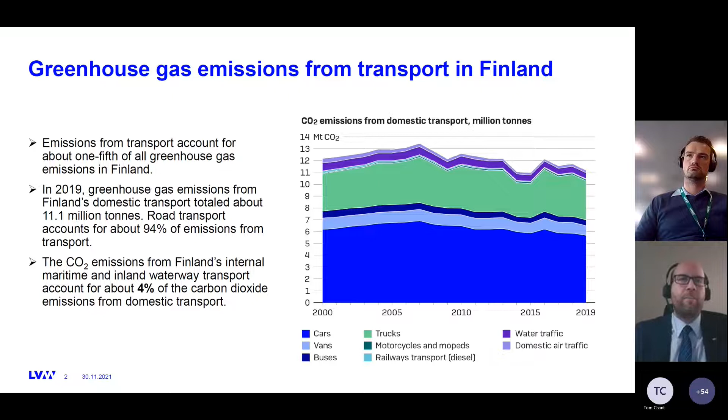There are very important negotiations going on at the IMO on these things, and also things happening, as you all know, on the EU side. I'll get to those later.

Just wanted to say that year-round shipping is, of course, very important for Finland. The Baltic Sea is one of the busiest seas in the world, and 83% of all freight transportation in Finland is carried by sea. Good connections to world markets and effective logistical chains are something we rely on here in Finland. Finland is practically an island when it comes to shipping because we have winter conditions here. Every winter, the northernmost parts of the Baltic Sea freeze over, and we have to ensure a level playing field for ice-class ships when it comes to international regulation.

Another aspect I wanted to quickly touch upon is short sea shipping in the Baltic Sea. This is a very important aspect of shipping for Finland, as the majority of goods to our ports come from or move between European Finland and other European states inside the Baltic Sea. So this is short sea shipping that we rely on very much.

This is also important on the emission reduction aspect because Ro-Ro and Ro-Pax vessels, which we have a lot of in Finnish traffic and Baltic Sea traffic, have emissions per transport work that are higher than other vessel types. This is kind of a special challenge that has to be solved somehow, and I really wish that we can solve this with our Baltic colleagues and our European colleagues.

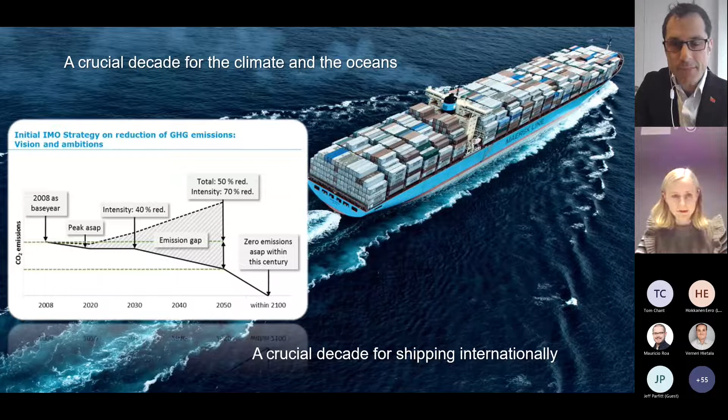As mentioned in the beginning, what we do in Norway does not happen in a vacuum. We know that we need to succeed with the global transition of the shipping sector if we are to succeed domestically, and vice versa. The GHG, or emission, situation of international shipping is also showing that further effort is needed, as you can see illustrated here in the graph. We are not on track internationally either.

If we are to succeed with the largest transition of the shipping sector of our time, cooperation is key, and we need to take actions together. Shipping is, as Eero also mentioned, by nature international. And the declarations already mentioned earlier, adopted at COP26, provide a very good foundation for cooperation among the UK, Finland and Norway in this context.

Firstly, through the zero emission shipping by 2050 declaration, we agree on the target. And secondly, the Clydebank Declaration provides a frame for how to think around the establishment of the first zero emission shipping routes necessary to get the transition going. The UK, Finland and Norway are perfectly situated to take on this task, and we look forward to continuing the cooperation with you. Finally, I also wanted to mention Mission Innovation and the zero emission shipping mission that was launched earlier this year.

We take part in this together with the US and Denmark as co-leads, and the UK is a core member. It's of course open for more if anybody else would want to join. This takes kind of the same approach as the Clydebank Declaration, but on a lower level. All of these initiatives are, in our view, important to succeed. Thank you.

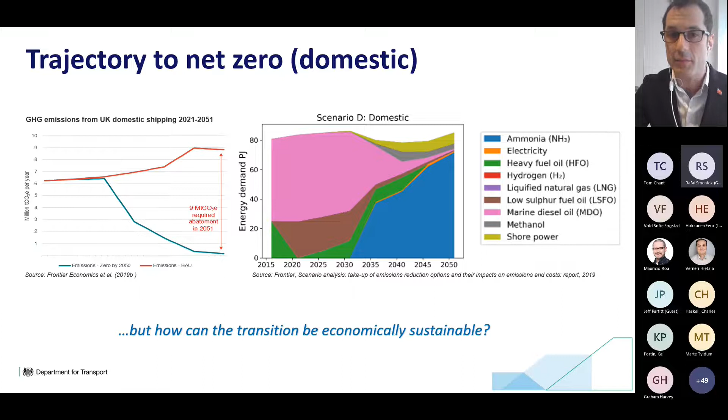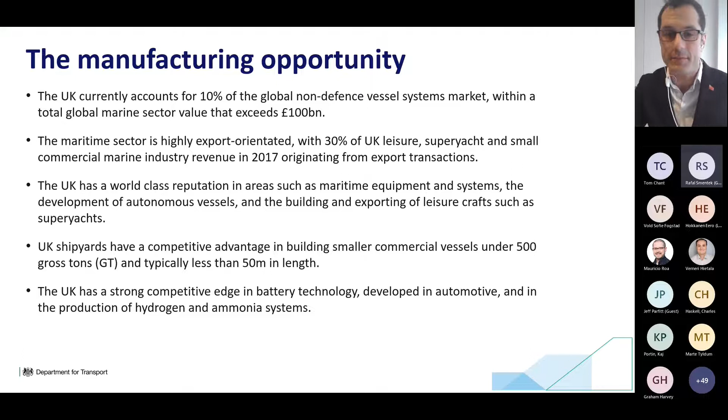So how do we harness all of this? There are problems to do that, and fundamentally, we do know there are - and I believe this is the same for other countries as well - a series of barriers to R&D and innovation in clean maritime.

One example is that in the maritime sector, at least in the UK, all actors are private, so no ship operators are going to invest in zero-emission technologies if they don't see the refueling infrastructure in place. But at the same time, no ports are going to invest in zero-emission refueling infrastructure if they don't see the demand. At the same time, there are split incentives to invest between ship owners and charterers, considering around 50% of the global fleet is chartered.

So the question is, how do we overcome all of this? Others before me mentioned the role of regulation, and we are exploring that. We do have a plan, and as mentioned, we started with a Clean Maritime Plan, which essentially sets up a series of interventions to do two things. One is to make sure that, to achieve the ambition that by 2025 all new vessels designed for UK waters are zero-emission capable, and to make sure that by 2035 the infrastructure is there to support them.

So we have implemented the Clean Maritime Plan, and we are now looking forward with the Transport Decarbonisation Plan, which has a section of maritime commitments on regulation - for example, setting up an indicative trajectory to net zero for the sector, and a consultation on a phase-out date for non-zero emission vessels.

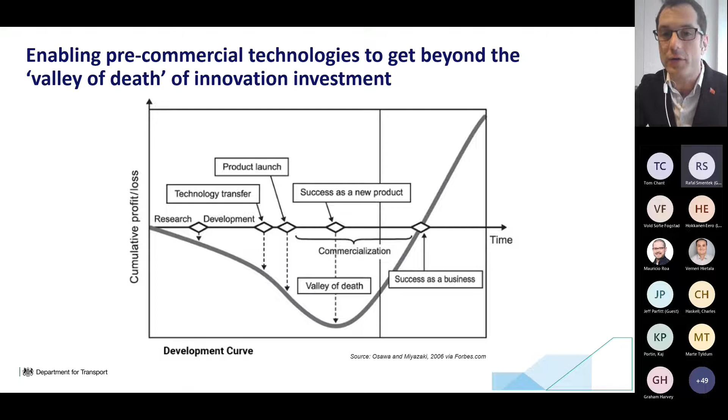So what government does with technology demonstrations is to plug the cash flow shortfall in the so-called valley of death, supporting innovators via R&D funding to get that product to commercial stage, which is what we are doing with the Clean Maritime Demonstration Competition, which was announced in November last year as part of the Prime Minister's 10-point plan. Essentially, this is a £20 million R&D program supporting feasibility studies and initial technology trials in emerging clean maritime technologies in terms of vessels, fuels, and infrastructure.

So this competition was oversubscribed. It demonstrated the capabilities of the UK maritime sector and, importantly, the appetite to invest. So with an initial funding of £20 million, we've managed to raise investment proposals for £70 million.

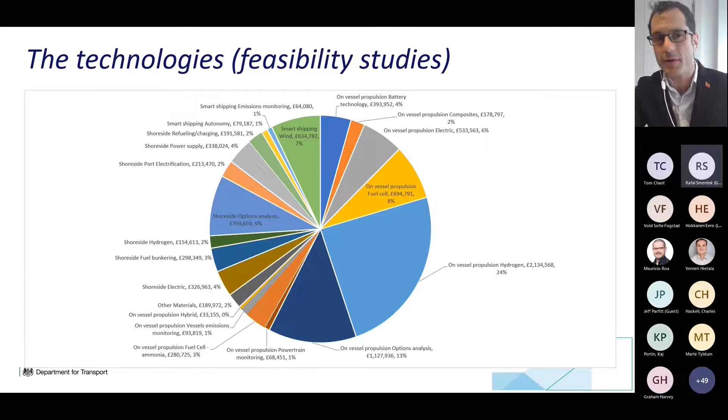There are a few other slides - I think we can share this presentation afterwards. I'll go through quickly, just to give a breakdown of technologies supported under feasibility studies and technology trials. By the way, that was for us real market research - for the first time, we were able to understand exactly what the intentions of the wider industry, including the maritime sector, are when it comes to investment in clean maritime technologies.

Now, for us the question is then - we have identified a UK clean maritime supply chain. Now the question is, how do we project that internationally? And the work that my colleagues on the international side of my division have been doing has been really, really useful.

So you all mentioned the role of the Clydebank Declaration in effectively bringing people together, right?

So what we've been doing is, on one side, immediately build a coalition of industry frontrunners with Operation Zero - 28 industry players in the UK, most of which are winners of the Clean Maritime Demonstration Competition, which shows the link with the domestic supply chain, focusing on accelerating the decarbonisation of offshore wind vessels in the North Sea.

But then, in the medium term, how do we institutionalize that as part of an international partnership via the Clydebank Declaration? 22 states signed up to the creation of green corridors - at least 6 by the mid-2020s, increasing after that. The idea is to have live places across different countries where we can test and deploy new technologies.

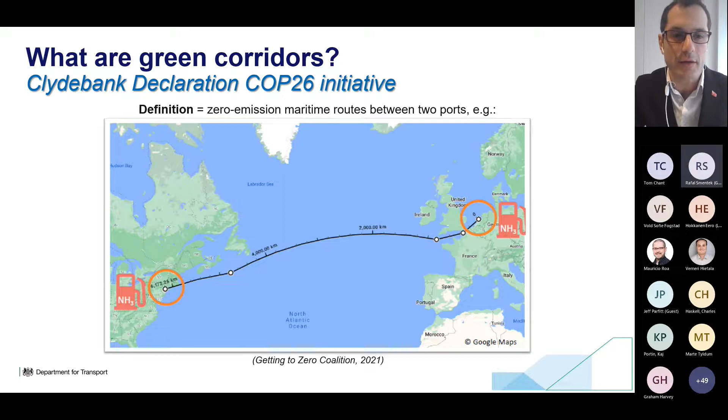To wrap up my presentation, the idea is to establish a series of routes in the near term to support the IMO agenda, but also create living labs where we can test those technologies. That's being delivered via a high-level agreement signed at COP. I'm very keen to explore more with you how we can operationalize Clydebank - and that's just a list of the signatories. That's it from me.

Paolo, thank you very much indeed - very interesting, great to get that overview of what the UK is doing. So all the policy people, if you could stay in the background, we're now going to look at organisations putting together the different technologies. We're starting with Lloyd's Register. Charles, give us an overview of their decarbonisation hub - it's going to give us the higher view of what's happening within the industry. So Charles, over to you.

Thank you, Tom. Okay, hopefully my slide is available. So firstly, just to introduce myself, I'm Charles Haskell, Programme Manager of the Maritime Decarbonisation Hub, a programme jointly set up between Lloyd's Register Foundation and the Lloyd's Register Group, with the mission to accelerate the safe and sustainable decarbonisation of the maritime industry.

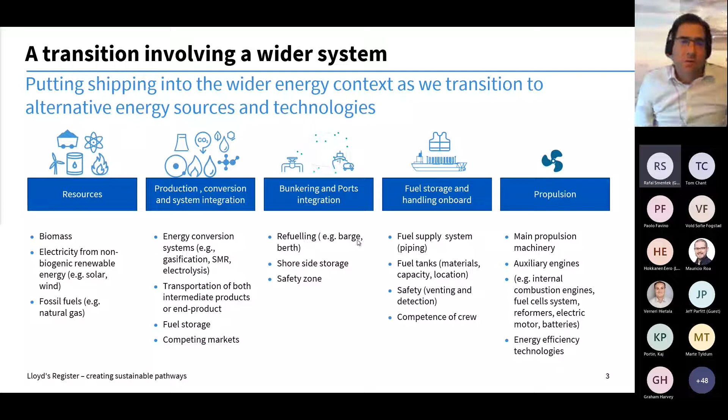So what we have seen is the technology readiness overall is the highest. Marine solutions are being validated. The Clean Maritime Demonstration competition has also been very good at this, selecting projects, and we are involved from the Decarbonisation Hub on some of those projects, particularly for the port side and the infrastructure projects, both at Port of Grimsby and also Portsmouth International Port.

When we look at the community readiness, as discussed, the policy levels are currently low. The policies are coming into place at the moment. We saw increased ambition at COP, and this isn't just, as we say, about the policy, it's also about that societal pressure now as well. We're seeing that through the coZEV agreement, as I mentioned earlier, but also other levers and people being more selective about the products they choose going forwards.

But what was very interesting when we built up the model was we had a low investment readiness level rating for nearly all of the zero carbon fuels across the different supplies and stages of the supply chain. So these fuels are currently more expensive than fossil fuels. There's uncertainty on the fuel relative to competitiveness in the long term, and the commercial proposition has not been formulated.

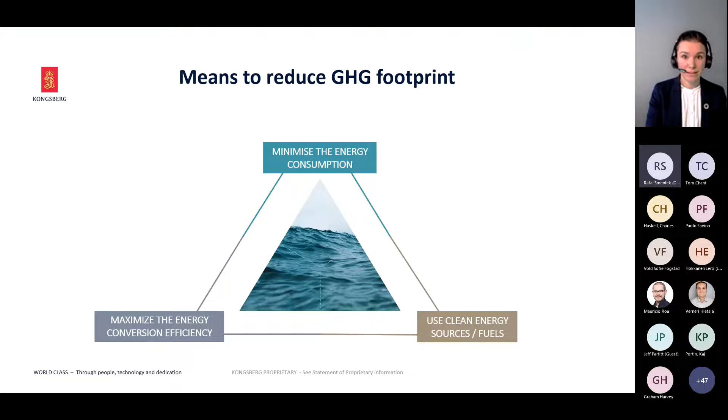Because there are several means to reduce your greenhouse gas footprint, and the most efficient is, of course, on the lower right corner of this triangle - use clean energy sources. Importantly, they need to be clean well-to-wake, including the production process of the fuel, and there are several really good candidates. Wind is rather interesting and will be touched on later today. We've just, a couple of weeks back, also signed an agreement with a company called Norsepower to integrate rotor sails. What I think is quite nice is that you combine traditional technology like our controllable pitch propellers with this new technology, and you get much better effect of these new technologies coming in.

In addition, you see batteries and shore power - of course, that's the far best conversion rate there is, but it has setbacks, for instance, for longer distances. The next speaker will elaborate more on these possibilities of new fuels. But common to most of these solutions is that they're more expensive than the current options. So minimizing energy consumption through, for instance, hull cleaning - we've developed a robot that will drastically reduce the need for hull cleaning. You can also use means such as route and speed planning.

And all of these would be of better and higher financial importance in the future than it would be today. Similarly, maximizing the conversion rate through optimal propulsion systems, maybe delivered in Finland, recovering waste heats, using batteries again for peak shaving, will continue to

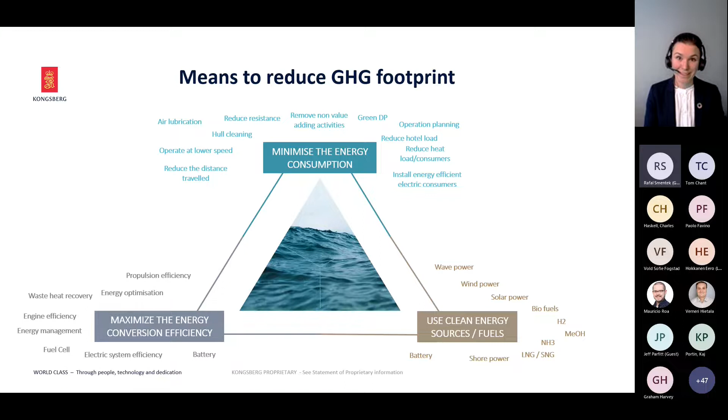Have really strong business cases moving forward. But as you see, the menu of solutions are quite broad. And for some of these initiatives, the onshore infrastructure and availability of clean energy will be the tipping point. And as a technology provider, we need cross-nation regulations and standardization for us to work with our customers to find our best solutions. So again, shipping is cross-national. And I'm very happy to see that, for instance, the Clydebank Declaration is tracking on with more and more countries. So that will be an exciting one.

So at the moment, we're running several rather exciting programs, trying to recover from what was called the valley of death, mentioned by Paolo, to have full-scale projects for low carbon and zero emission. Some of these I've summarized on this slide.

And the HySeas III is a program for pressurized green hydrogen. It was supported by the EU Horizon 2020, but it is a full-scale and scalable hydrogen solution. And I'm very happy to say that we're closing in on the last phases on this project. So for those of you who are really curious on hydrogen, please do reach out after this call, and I'll provide you with some more findings and some more details moving forward.

We also have Samskip and HyShip on hydrogen. And it was mentioned earlier that Norway has really looked into hydrogen as one of the solutions to especially short sea and domestic shipping. But then again, we have the now sailing Yara Birkeland, as well as ASKO, targeting the quite exciting combination of autonomy with fully electrical vessels.

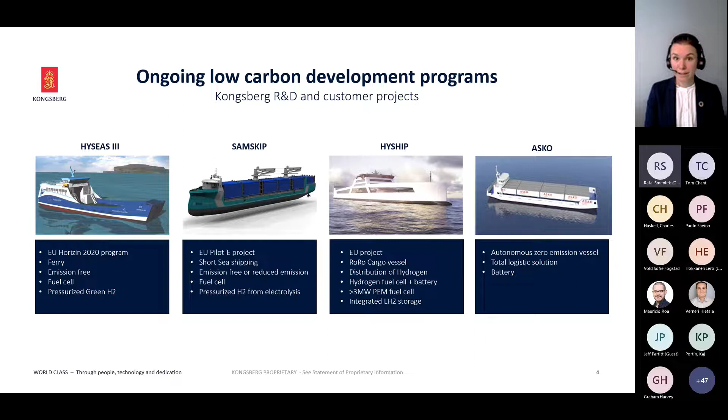So also there, what I find is quite exciting is that these projects are done together with the cargo owner. And the cargo owner has really pushed us as a technology provider to deliver something directly for them. Other initiatives like the coZEV was mentioned, and I think the strength of the cargo owners would be really important moving forward.

But we have on the ocean around 100,000 vessels sailing. All of these initiatives that I showed you was new builds. Kongsberg has, as I said, the broadest portfolio of products for the maritime industry. That means that 30,000 of these vessels are sailing with our equipment. And that is a big responsibility for us.

And it also has taught us that there is not one silver bullet when it comes to green shipping, because each vessel is different and each operation is different. There might be 30,000 silver bullets. And upgrading the sailing fleet is still a huge potential. But sometimes we need a little bit of an external push to get it started.

In the end, we introduced batteries, renewed the propulsion systems, we had new engines in and new control systems. And additionally, the vessel itself was completely upgraded and renewed to provide this modern experience that the passengers want. And that is also important when it comes to sustainability, to think whether or not we should scrap or build new or prolong the life. So as mentioned, these vessels had 25% reduction in fuel and emissions, and a significant prolonging of the lifetime. And the cost of all of this was around 20% of building a new vessel.

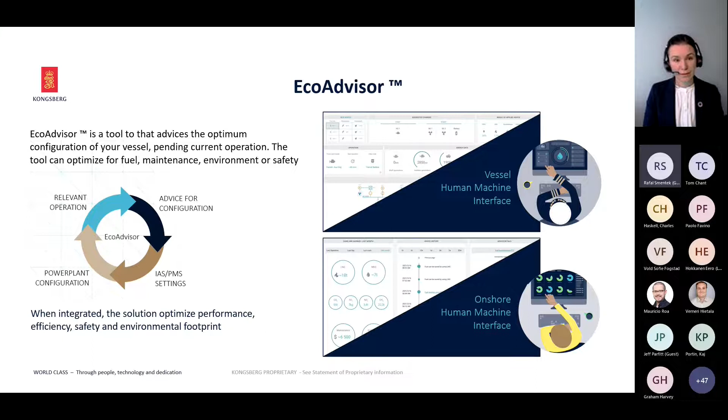Hello, right. Oh, it's gone a little dark there. Kaj, here we go. Sorry Kaj, I just missed that little transition there, the handover. So over to you, Kaj, from Wärtsilä.

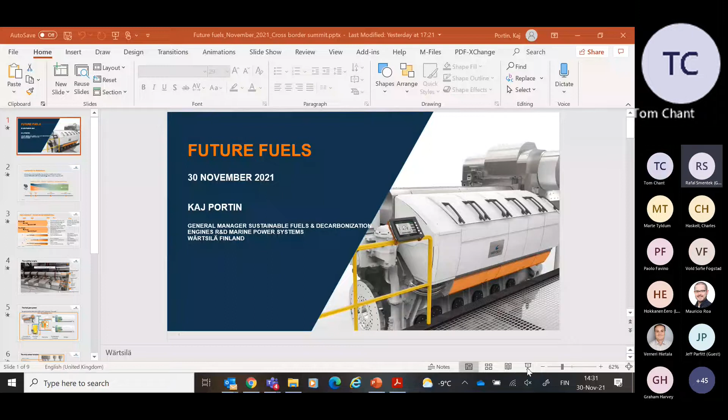One sec, yes, thank you. That was a real nice pass from you, Marte. Came very quickly, so I have to see if I can share my screen now. I hope you can see it. That's great, thank you.

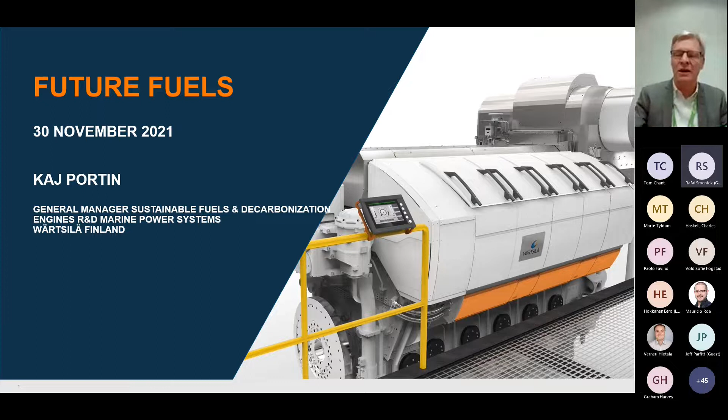As Marte said, I will now speak more from Wärtsilä's point of view about what we do with our engines in this area. Wärtsilä is of course looking into the whole ship solution regarding these issues that Marte was presenting. But in my presentation, as an engine developer, looking at the new fuels coming, I will present how the future can look and how prepared we are.

If we look at the future, what we know is that there is a transition ongoing. That's, I think, the only certainty we have at the moment. When Wärtsilä looks at where to go with the transition, we say that we will follow it by being good on the engines today, while at the same time being prepared for the future.

How we see future fuels is that today, as was shown by Paolo, we have heavy fuel, diesel and gas. Later on we will see drop-in fuels that can be blended into diesel or gas, like biodiesel or biogas, which can be immediately taken in. Further on we will take in new fuels that won't fit in the same fuel tank but will fit in the same engine and can be burned together with the fuel we had before.

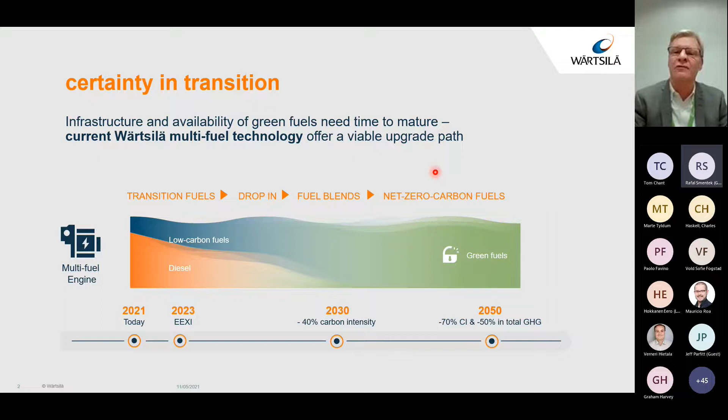And sometimes, after some years—10, 15 or 20 years, I don't know—the world will be ready for utilizing net zero carbon fuels, and then we will also have the possibility to use it in our engines.

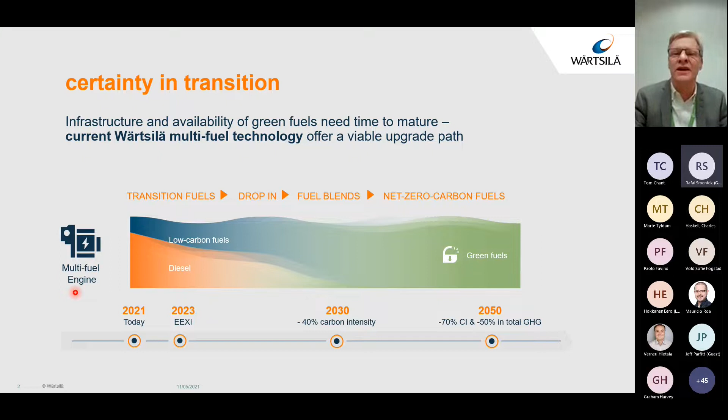What do we need for that? On the left side, we need a multi-fuel engine, because we cannot really say what will be the future fuel and when it will come. I agree with Marte here—you said, are there 50,000 silver bullets? I also agree with that, and I would add that there is a new silver bullet every day. So if you've bet on something today, it could be the winner, but it's not the winner after 5 years or so.

That's why we've built our engine program to look at two main streams with the fuels we have today: LNG or natural gas as one mainstream fuel, and diesel or heavy fuel as the second mainstream fuel. Both of these are today fossil fuels, but they can be made as bio or synthetic in the future.

If that happens, we can say we are already prepared and have been for quite a long time, because we don't need any new infrastructure on the vessel. The performance of the engines and the vessel will be similar or exactly the same as before.

Then, of course, if we go to real decarbonization—because here you will have decarbonization on paper, but really from the stack of the vessel and the engine, there will be just as much CO2 emissions from biodiesel as from fossil diesel. Then it's just up to legislation how you compare these two. But if we really want to get down in CO2 emissions, then we utilize fuels that don't have carbon in them, mainly hydrogen and ammonia.

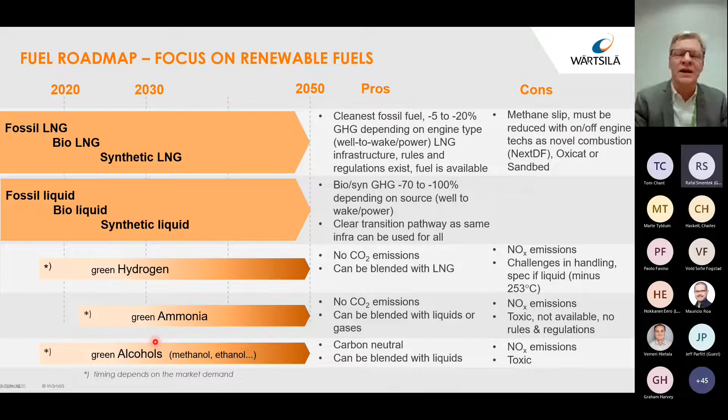How do we do this? We need to be flexible. We don't want to, or we cannot choose what fuel to be used now or in the future, so we instead make the engine so it can utilize all the fuels that are coming. Here I have just a list on the left side of the fuels that I have been using now on my engine. This used to be a diesel engine a couple of years ago, running only on diesel and heavy fuel, and now today we have been running on most of these fuels and still continuing to develop this for the fuels.

Also, the engine doesn't know if it's a biofuel, synthetic, or fossil fuel. So when we test, for example, ammonia, even if it's not green ammonia, for the technology development this doesn't really matter so much because the results will be the same. It's only then about waiting for the fuel and getting it in.

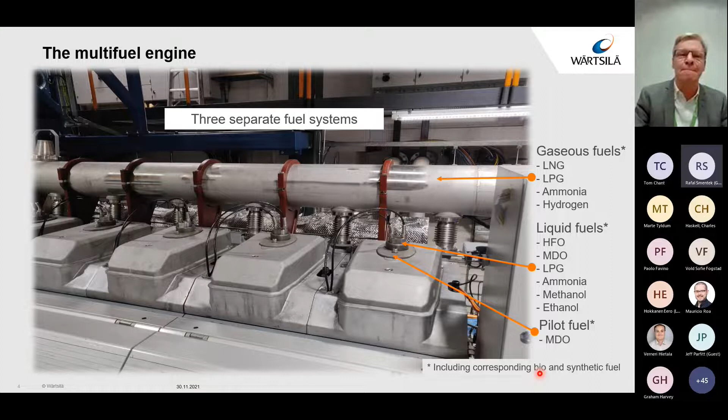Just an example of how to go forward in the future. If you today have designed a vessel or an engine for running on LNG, then you have fuel tanks with LNG, and you have control and you have the engine. When you want, and you get ammonia, then you can change.

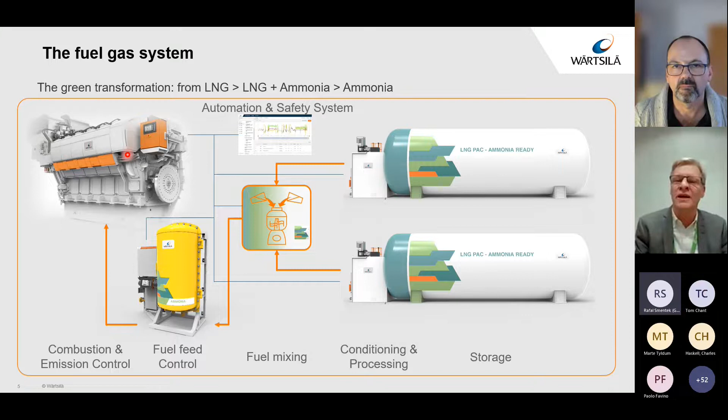So one of the fuel tanks is ammonia and the other one is gas, and you mix them before the engine and then continue. Then in the end, when you don't want to use LNG anymore and you are getting ammonia, you can utilize both tanks as ammonia and continue with pure ammonia operation. Whether this is within 1 or 10 or 20 years, I don't know, but the system is already there just to take it in.

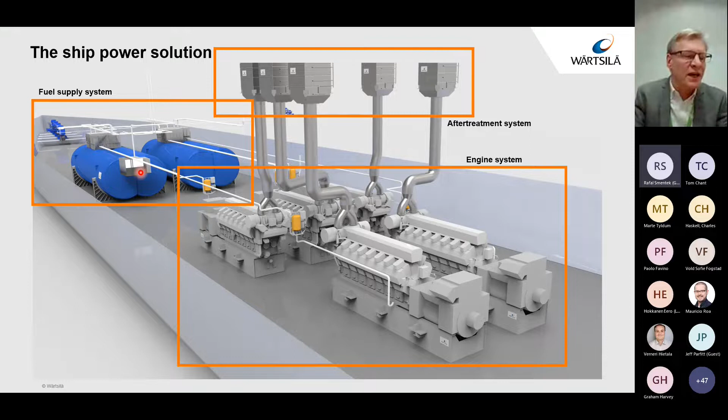We are also looking at that the engine is not only the engine. We are also looking at the fuel handling, in this case how to get the fuel, and as was said by Charles here, in a safe way. This is very important, especially when we have the discussion about ammonia and hydrogen as fuel.

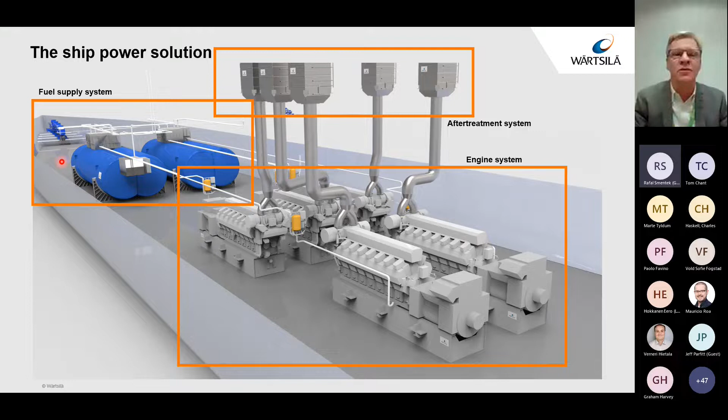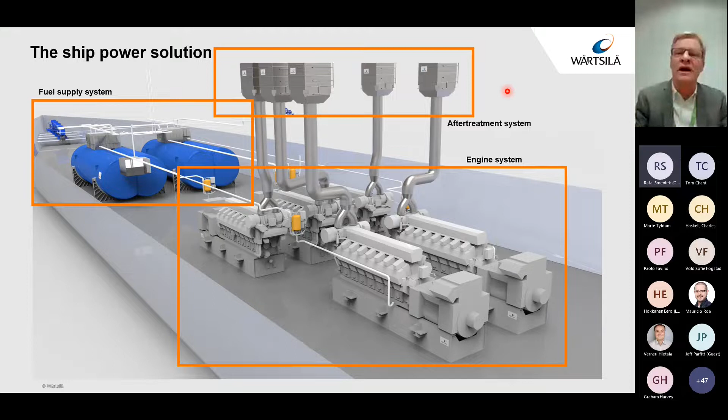Both are challenging, ammonia is very toxic and hydrogen is very explosive. So here we are looking very much into the legislation and what to do regarding bunkering and storing. Then the engine system, how to control the engine with different fuels, changing all the time or optimizing for one. And finally also looking at the after-treatment system of the exhaust, because there will always be some exhaust that has some kind of emissions, and if we cannot get rid of them in the engine, then we will have an after-treatment system to take care of that.

So looking at the areas where we would now like to cooperate with you all here, and where I see that we already do. Now I'm looking at this from the engine's point of view, but I think you have had the same things, looking from different points of view. But first of all is the legislation.

What can you do? What should you do? And is it the same if you do it in Norway or Finland or UK? This, I think, is very important, so we get a legislation that we can trust, so we can develop according to that. Then, of course, there's what I call the real work: to make the systems, the fuel system, the fuel handling, engines, exhaust and after-treatment system, etc., good, affordable, and robust.

Then the following, which has not been talked about today, is very important. When new fuels come in, we will need a lot of training and protection equipment for people. The training, especially for operators and service people, is a big thing we are looking into now, how to get them fully trained before the first vessel is out there. And then, of course, with new fuels and new systems, there could be teething problems.

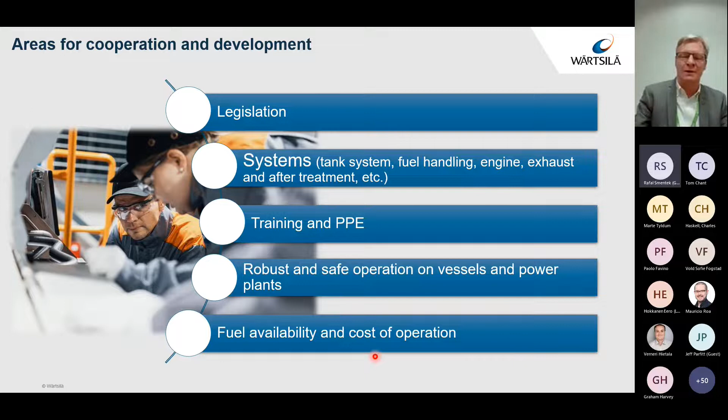Methanol, green methanol - Wärtsilä has already had one engine out, one vessel out with Wärtsilä engines, Stena Germanica, Sweden to Germany, already 6 years. So we show that the technology is working, and this is a good demonstration of utilizing methanol.

And then ammonia and hydrogen we are now developing, and the plan is that we will have the technology ready for ammonia already after 1.5 years, so we can go out demonstrating on a real vessel, real operation. And hydrogen - we already said 5 years ago that we can blend in up to 25% hydrogen, and now we are also developing our engines for pure hydrogen operation. But this will take somewhat longer.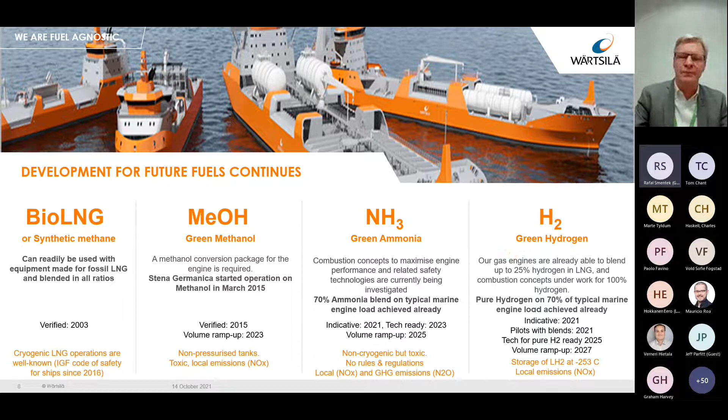Thank you. This is ending my presentation.

Kaj, thank you ever so much. That's an incredible amount of investment going on across all those different engine types, isn't it? Thank you for sharing that. I didn't realise some of the trials have been going on so long as well.

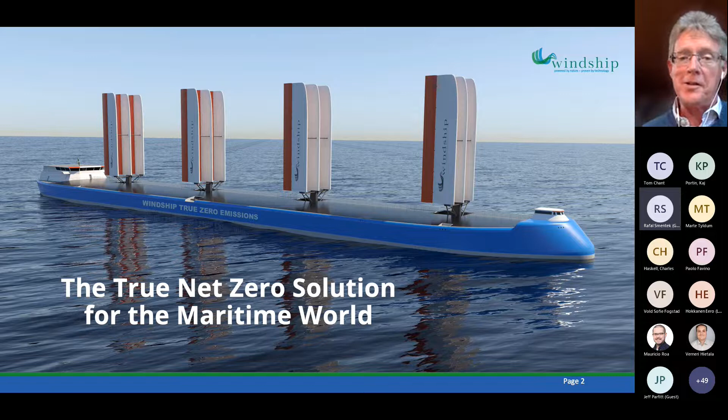So as you can imagine, we've done multiple iterations of the potential wing combinations, using CFD and our partners. And this established that whilst high lift coefficients can and need to be achieved with wings, it is surface area that is needed to develop the required ship thrust.

So the final solution was a tri-winged rig, which you can think of as effectively turning a single 100-metre high rig into a 36-metre high solution that can be more easily handled and controlled. And the performance of this rig has been verified through CFD, wind tunnel testing, and the Wolfson Unit at the University of Southampton.

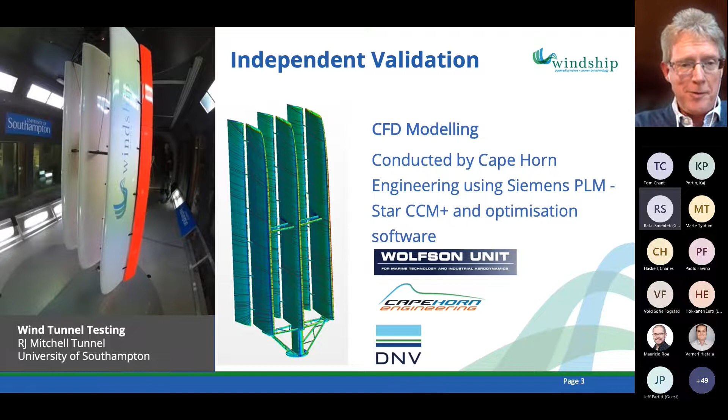Now, I've stated that the rig is powerful, yet I should clarify that. If we fit 3 of these 36-metre rigs, as shown here, to a Panamax Kamsarmax size vessel, so 80-odd thousand tonnes, we can provide 100% of the required thrust in 25 knots of breeze. So we are therefore sailing the vessel at this point, and it's not wind assist, but wind propulsion.

So this is an overview of the wind propulsion part of the story.

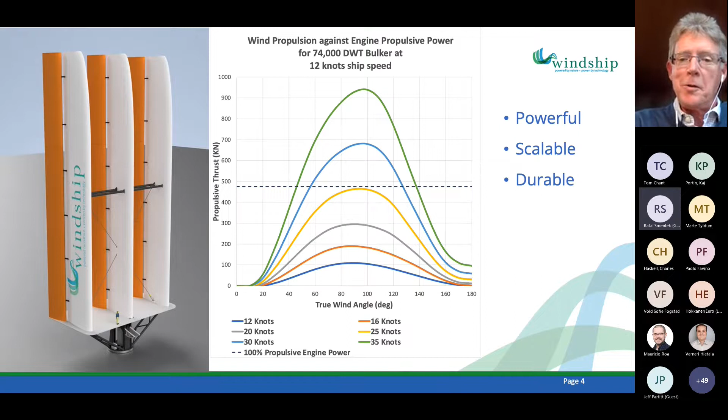So why did a company called Windship decide to look at the whole drivetrain issue? Well, the reason stems from the power the rigs can provide to the ship, which is forcing the existing engine and propeller system way outside of its usual operating envelope. This means we're not going to achieve all of the emission gains possible unless this area is addressed.

The move to electric propulsion allows us to add in solar power where the vessel geometry and route works, and indeed other green technologies such as batteries can be added in on the same system.

The current design has a number of diesel generators providing the electrical energy required for the motor. This modular approach allows the system to be flexible, switching off engines that are not required to ensure that the remaining ones operate effectively. Then, as we are using fossil fuel, we've worked with a company called Calix with their recast system, which captures the CO2 through an exothermic reaction, which allows us to recover further energy from the exhaust through a steam cycle.

So let's have a brief look at each of these system components.

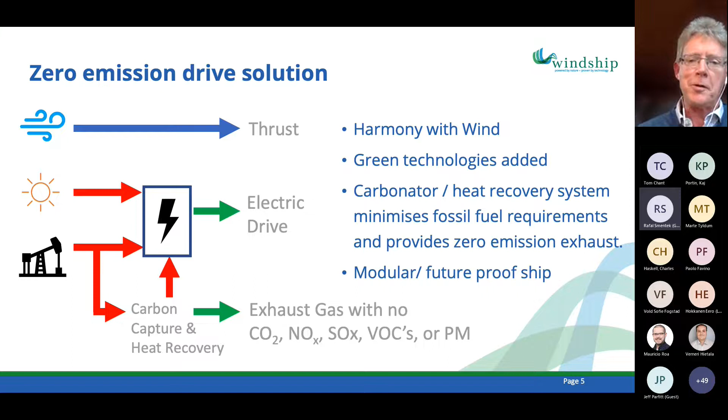Firstly, solar. Clearly not having to burn fuels would reduce emissions. So alongside the wind propulsion, we believe that solar can provide a useful addition to ships, especially tankers, where large areas of deck space are available. On bulkers, there is a concern over damage during loading and unloading, which we need to investigate, and potentially use of these panels in sheltered areas, such as the superstructure, would be a start. We have commenced work with one of the global manufacturers of these panels, and we are conducting some initial tests.

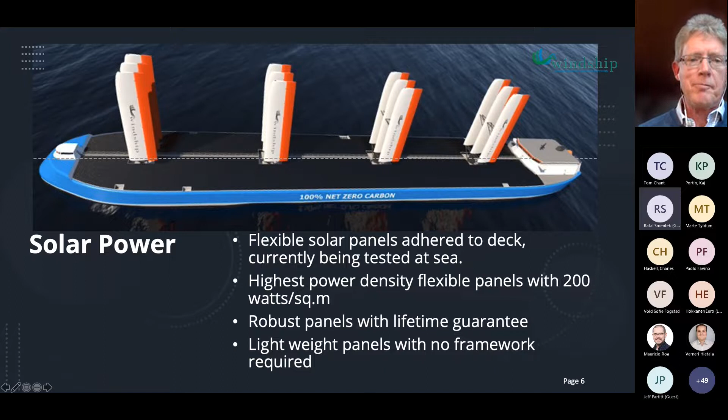The carbon capture and heat recovery system is the key to a zero-emission exhaust. The system works through the CO2 reacting with lime in the exhaust system. This reaction creates limestone and releases energy, which is recovered through a series of heat exchanger circuits to produce steam. The steam then runs through a three-stage steam turbine, which in turn powers one of the new electrical generators. The effect of this is that a recovery of up to 40% of the original engine power can be injected back into the drive system.

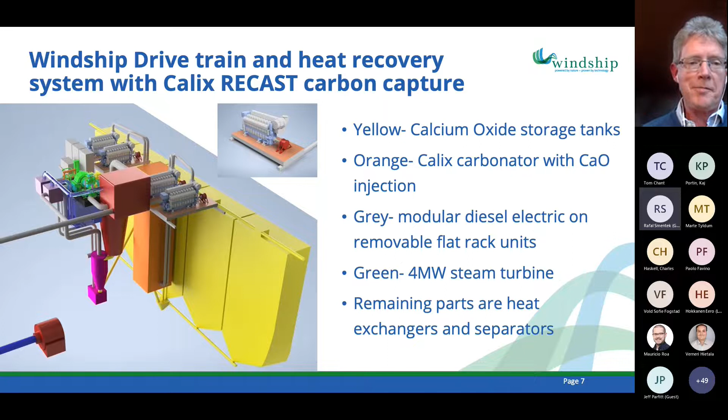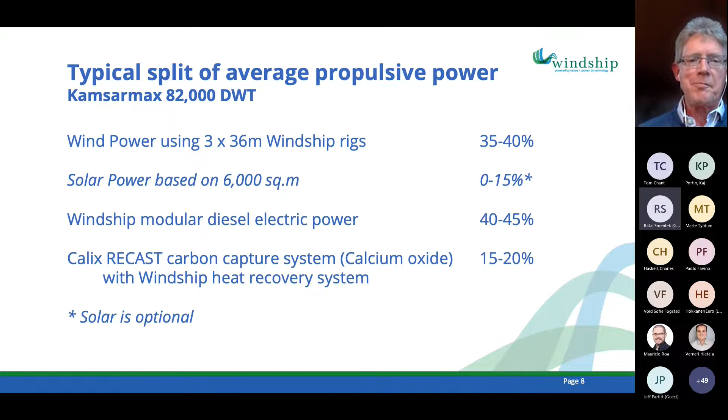We've run an analysis of the economics of this on a Kamsarmax on 3 transoceanic trade routes, loaded and in ballast through all 4 seasons. This has shown an average fuel requirement of 8 tonnes per day, compared with perhaps the best ships of this class out there at around 20 tonnes a day. At worst, we expect an equivalent OPEX cost comparable to the existing vessel, whilst emitting no CO2. And this analysis does not include any benefits that could come from carbon credits in various systems yet to be discussed and agreed.

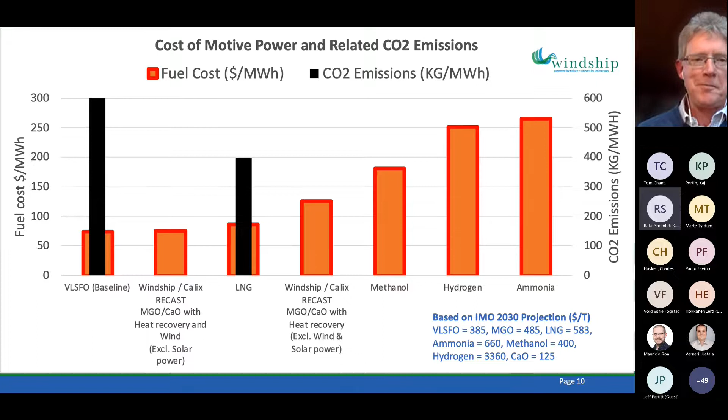So finally, just a quick summary. As I said, we have a full Windship solution. It provides ships with OPEX costs equivalent to or better than current ships for our target market, whilst eliminating emissions. And we are at the stage in our development where we are seeking funding and technical collaborations to move this from concept to reality. So thank you for listening, and I look forward to the questions.

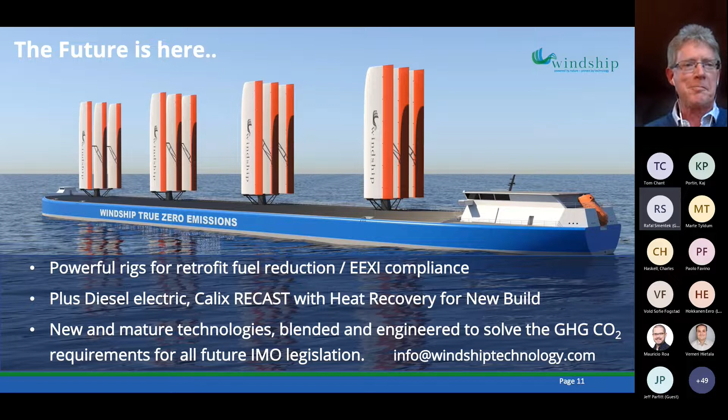Thank you. There's been a few questions in the chat, and I will try to summarise those, but I was just going to launch in with one to start: from the discussions here, does the Clydebank Declaration actually enable the speeding up of investment? At the moment we've got this VHS Betamax moment of where do you put your money, what's your favourite. Does having two ends of the puzzle, one in the UK for example and one in Norway, enable us to get faster trialing and move towards the scalable solution? So any views from the panel on that?

I might just look at Charles actually, as you mentioned the scalable side there - so Clydebank and speeding up the process.

It's a good question, and I suppose the devil is in the detail with how the Clydebank Declaration is going to work. But the first step is the commitment from the governments, and then they've got to work on how to de-risk and get the investment into the supply chain. Predominantly you've got the shippers and the investment required there, but then you've got the port infrastructure and how to get that working. So if you can get two ports working between each other, to have the fuel infrastructure in place, the safety standards as well as for the acceptance of the fuel and the bunkering.